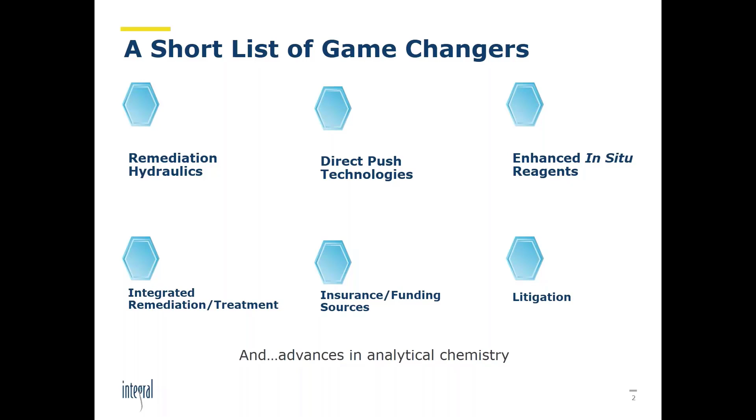And then, some bigger picture stuff: funding sources, the role of insurance historically in our industry, what it might look like in the future, and litigation. I think it's something that often isn't talked about, but I want to address it because it does affect what we're doing in the remediation world. Also touch on advances in analytical chemistry over time, what I've seen that means for us, or what it might mean for the future, and then possibly some other forces at play more recently that could affect our world.

Just getting into it, it's been over 15 years since Remediation Hydraulics was published by some of my former colleagues at Arcadis. And if people aren't familiar with this textbook, and much work that's happened since then building off of it, I highly recommend reading this, absorbing it. This was really a breakthrough effort.

A lot of people were involved in it to really understand, when the application of in situ reagents, what were we really doing hydraulically in the subsurface? And that wasn't really that well understood. I think people forget that, and all the lessons learned and all the hard work by so many people on so many projects to get a better handle on injection pressures, fracking conditions, non-fracking conditions, what is an appropriate volume, let alone dosing, to put in the ground to affect a certain remedial strategy.

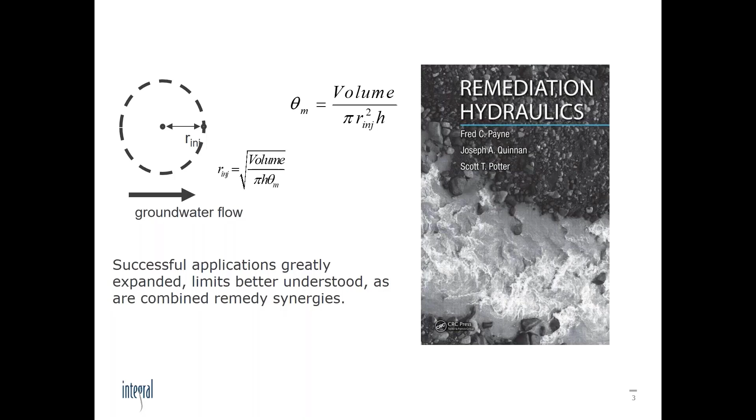And this has continued to evolve. And again, still a lot of great work has been done since this, but this was a fundamental breakthrough effort. And I think it's important to acknowledge that.

I'm going to sound like the old guy a lot on this talk, but when I started in this industry, we didn't have any direct push technologies. GeoProbe didn't exist, and other types of direct push drilling, let alone all these probes. Really, all there was cone penetrometer technology, and then there started to be an evolution of environmental applications from cone penetrometer technology. Fast forward to today, we have the HPT tool, we have TarGOST, we have all these MIP tools. We have all these sensors, and it continues to evolve.

These applications of direct push technologies, and we're understanding their limitations better as well. But the ability to collect a lot of high quality data is a blessing compared to where we've been in the past. We can collect a lot of data for a lot less money than we used to. But I think the challenge that we have is finding the sweet spot with site scale and really cost efficiency.

There's some sites that are very, very well funded, let's say by the federal government, and we have the luxury of collecting a whole lot of data, frankly, whether it's needed or not, but at least that option is available. And then there's a lot of other sites, perhaps the world most of us live in, where there are limited budgets and we have to make really important decisions about efficiency with regard to data collection. Well, these tools help us make those decisions. And I think the challenge is finding that sweet spot of getting enough data to move the project forward, but with more focused budgets.

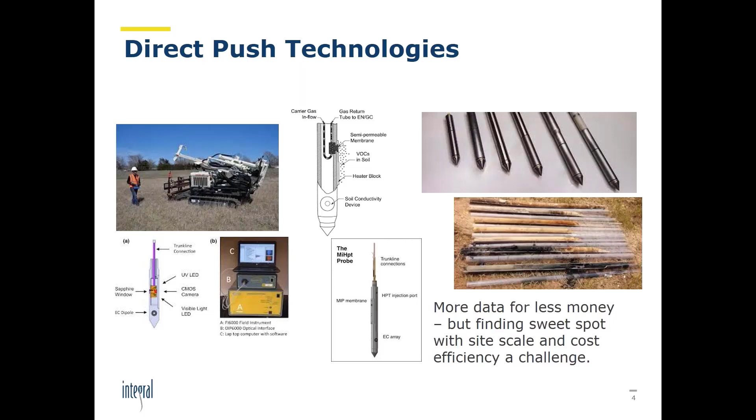But I think what I'm seeing is the real art of this is taking advantage of all these direct push technologies, but still rolling them into the context of an overall conceptual site model that's dynamic and workable and moves a project forward. We've had, in addition to direct push technologies, we've had the development of In Situ Reagents.

And too many to list here. I think there's been an incredible evolution. We didn't have this when I first started in the industry. We've had this incredible proliferation of technology companies like REGENESIS, and development of reagents to treat a whole range of contaminants, and this continues. And really what was a game changer is increased reagent longevity has been a total game changer. If you look at just enhanced reductive dechlorination, but there's other examples.

In the old days, we would inject highly soluble reagents and have to re-inject them relatively frequently. And there were all kinds of biochemical issues associated with that. Now being able to use and inject reagents that last, slower release agents, has reduced the cost dramatically of implementing these remedies. And just another tool in the toolbox. It's really been a revolution.

And again, there's been an expansion. I mean, just look at zero-valent iron and finally cracked the nut on having a soluble form of that to inject. And for years, that was something that was under development. So there's still advances being made.

There's advances being made in combined reagent and delivery approaches. It's becoming more affordable to implement gridded approaches, whereas in the past on the larger sites, we had to take injection line approaches because that was really the more cost-effective approach. So it's just more tools in the toolbox, more options, because we have better injection options and we have better reagents. Sorting through all of that, it's still there's still a lot of work to do on every site to make the best choices there.

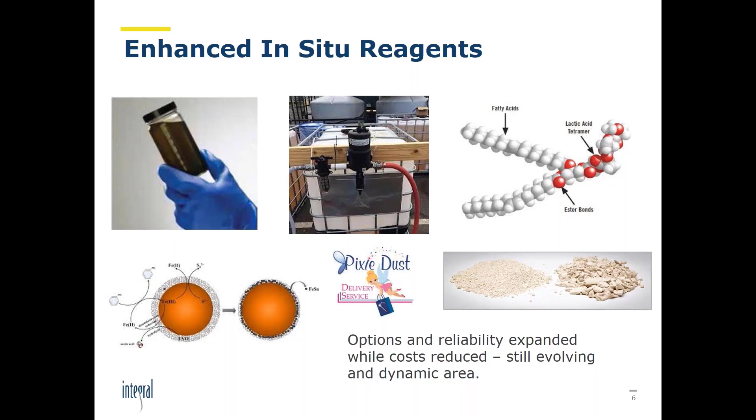But I think there was a shift in our industry towards in situ and rightly so applications, but we sometimes forgot the lessons learned from the mega plumes and the really big sites where in situ applications the scale is not appropriate.

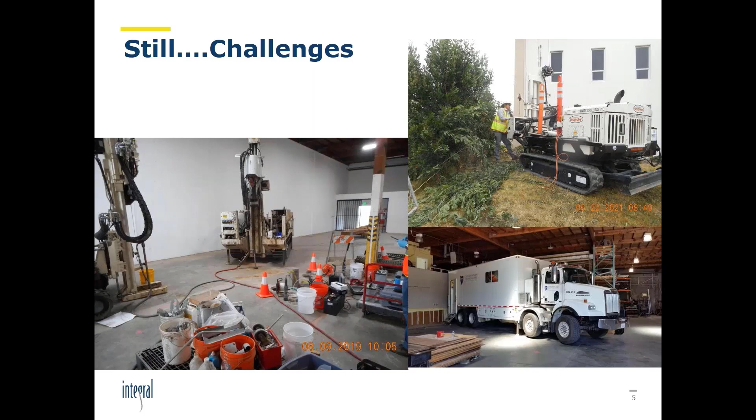Moving forward, I want to talk about something I don't think gets talked about enough in our industry: when you get to larger scale sites and think about sustainability and water supply issues. Emerging contaminants such as PFAS are shining a bright light on how we do integrated remedies that provide finished water where it's needed, whether for agriculture, drinking water, or commercial and industrial applications, while also integrating a remedial component.

And the reality is we're just going back to the future. In the early days of remediation, there were many massive pump and treat sites, with all kinds of issues. But one thing done at many sites, which we've advanced through time via groundwater extraction and reinjection, and focused groundwater extraction and reinjection, is that there were quite a few large plumes that were ultimately remediated and provided a lot of water supply in the process.

And we're seeing a return to that. I can think of some major projects in Southern California, projects I'm involved in, and litigation around these issues. But I really believe we need to move more aggressively toward integrated groundwater approaches that link remediation with supply, especially in times of drought, which we're seeing more and more of with climate change.

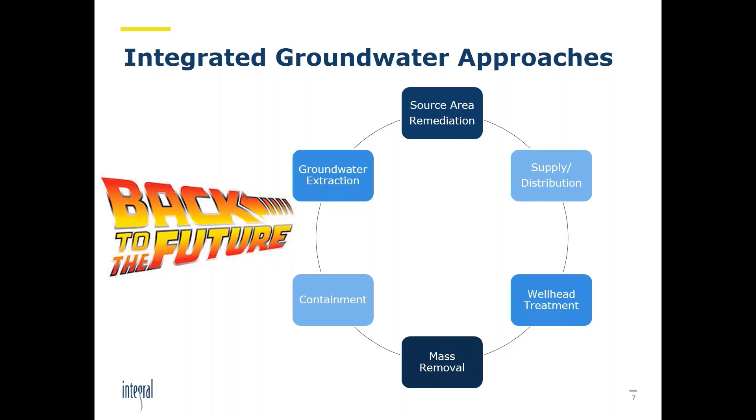So I'll get off my soapbox and talk a bit more. I do think it's important in the remediation world that we keep drinking water supply close to our hearts, because we're going to see more integration here. But I want to highlight that the answer isn't always treatment. When you look at some of the biggest water supply issues around PFAS, it's really important to remember the word mitigation and mitigation alternatives.

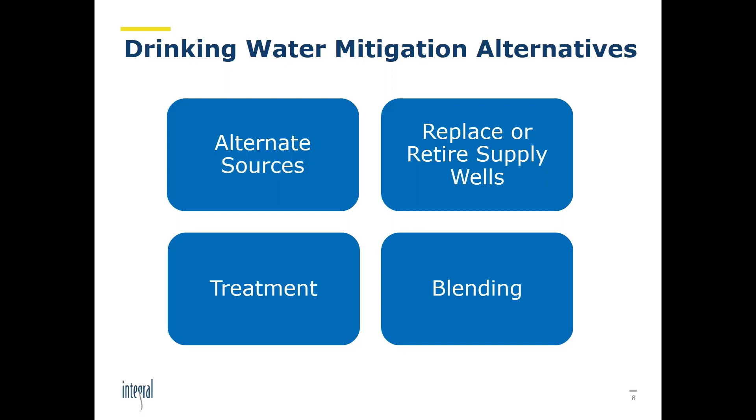Personally I'm very involved in this, and so are other folks. It's about getting into the realm of water supply, where we look at alternate sources, replacement and retirement of supply wells, deepening of supply wells, refurbishment of supply wells, alternate supply wells, sometimes treatment, sometimes a blend of treatment and alternate sources, and blending, which is done all the time in water supply to deal with various constituents of concern. These are tried and true tools in the toolbox, and I want to make a plug for remembering how much we've learned about these things and how much they can be applied in drinking water treatment, but also in remediation as part of integrated remedies.

Let's talk about funding sources and non-technical things. Whether folks realize it or not, so many major big projects that I worked on over my career, and still work on, have been funded by general liability policies. These are old policies that companies had to cover general liability, and environmental contamination, to speak plainly, fell under them, so you could claim costs and get funding for remediation. That was a big driver, and it still is a big driver in our industry, whether people realize it or not.

But over time, even before I started in the late 80s, those policies were being rewritten in a way that excluded these broad terms allowing claims for pollution. It's been 30 years or so, and some of these policies are maxing out, some have expired.

You've got the newer policies out there. So the funding, this general liability is a funding source, let alone other insurance products related to cost cap insurance and things of that nature, which have largely, almost entirely gone away, that funded a lot of work as well. This source of funding is less than it used to be.

What will it look like in the future? I think it's kind of a game changer. There will have to be other sources of funding. And when you look at PFAS, that's almost being entirely written out of these policies because the insurers have learned. So just something to be aware of.

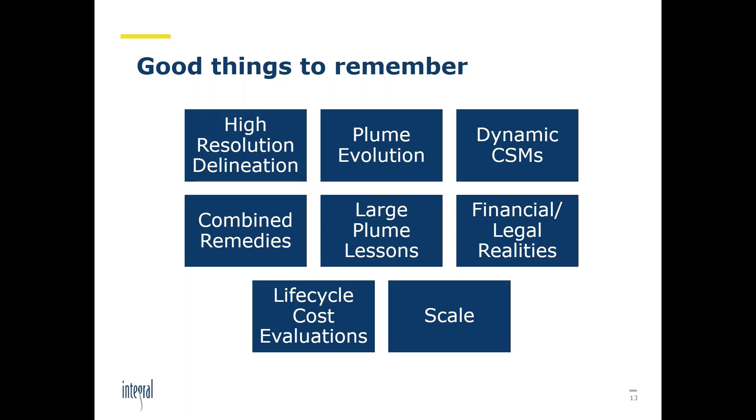And I'll just throw this in here, and then I'm going to run through about six slides on PFAS and then hand things over to Ryan.

We're hearing a lot about ESG criteria - environment, social governance. I'm not going to say a lot about this other than things are evolving, and there's some questions being raised. Will spending habits adjust in a changing world towards truly sustainable projects? What is sustainable? We're already seeing some changes here, but will we see a lot of changes towards climate change driven spending versus, a lot of what we've seen in the past, cleaning up low threat anthropogenic chemicals in the environment? Will there be a shift in priority due to climate change?

I think sometimes we think there's infinite funding available for our industry, but will there be a refocusing around drinking water mitigation? Will there be a refocusing around what truly is reducing risk? We've been talking about this stuff for decades. Hasn't really happened yet, but I am concerned about it with regard to PFAS and other emerging contaminants, are we making the mistakes of the past and maybe not focusing our resources as well as we could have?

It's something to think about, and I think ESG and other related topics could be other forces that help change how funding occurs. Let's shift gears to PFAS, and I know I'm taking up a lot of time here, so I want to just address a few things.

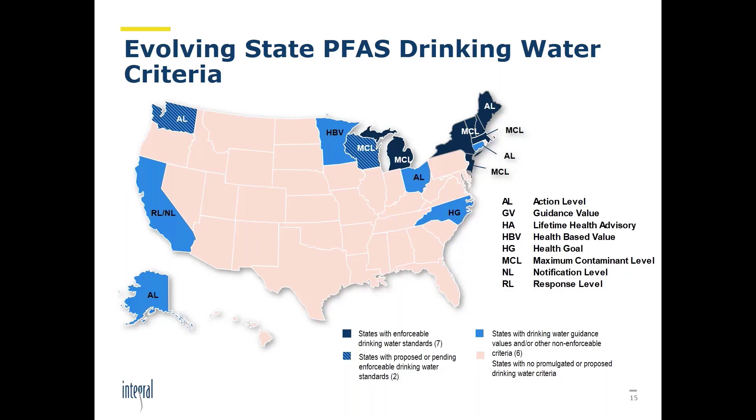Integral is preparing some interactive maps that will be on our website in the next couple of months for groundwater, surface water, and drinking water, just because I think there's a lot of misinformation on this, and it's important that we're all on the same page when we have these discussions.

Here's the actual enforceable drinking water standards in the United States right now. The ones in Washington are proposed. Wisconsin just moved from saying, hey, we're going to regulate 2 to 4, but they still haven't figured out what those are, but the intent is to do it. But these are mostly long chain PFAS, and you can read up on resources to understand the difference between long chain and short chain PFAS, but there are some short chain PFAS in here. But anyway, it's important sometimes to just see it all in one place where we are.

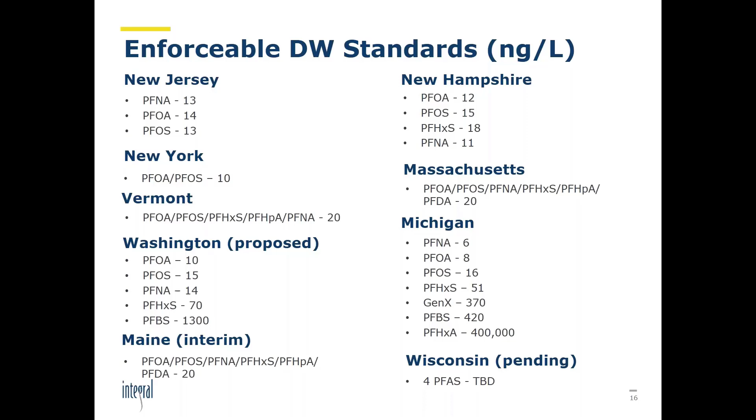What's going on with this? Some states have chosen, and again, I'm just going to focus on drinking water here because I think it's representative. Some states have taken an individual approach, we're going to look at each compound, we're going to assess the risks individually. And then we have some states that are regulating PFAS as a class. There's a lot that's been written on this, and I encourage people to get learned up on this. It's a really different mindset and approach being taken by regulators.

And in Colorado, in their surface water regulation, which is what they have right now, it's a mix. It's really interesting, actually an interesting regulation to read. But I'm just trying to increase awareness here. There's a lot still being sorted out here.

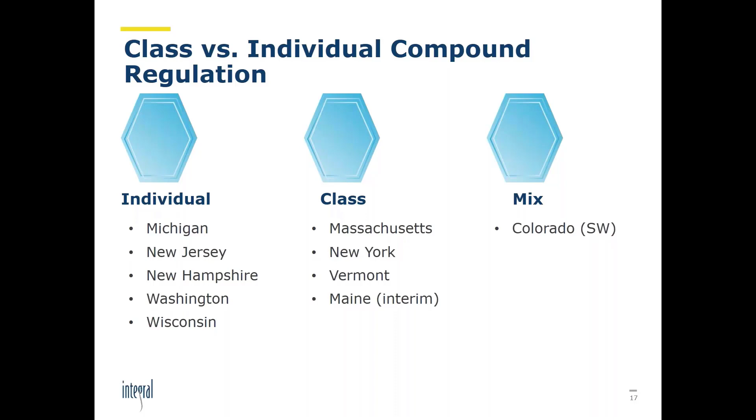Just looking at short chain PFAS too, because there's been a lot of conversation about short chain PFAS. I recently did this for a project, just looking at what is for PFBS, PFBA, GenX. These are the PFAS that are being regulated with enforceable drinking water regulations in the U.S. right now. Just look at the range in some of these. Look at the range for PFBS. Look at the range for GenX. Look at the range just in general.

So it's what this represents. There's a lot of conversation on this subset. These large ranges reflect different interpretations of risk between short and long chains, and also just within the short chain subset. There's a lot of discussion and concern about this, but I really think it's worth asking the question: how many projects are really going to be driven by short chains, and is there going to be a consensus that's built around PFAS in general, but the short chains in particular?

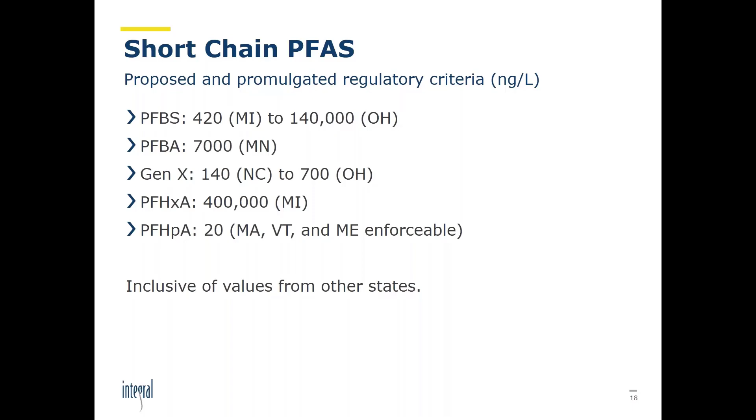I was recently working on a project where the client was making a big deal about, there's basically fear about short chain PFAS in the water supply. But when we actually looked at the data, none of the short chain PFAS that were there, and there was maybe 3 or 4, were anywhere near any proposed limit that's out there right now. So it was a good educational moment, I think, for everybody on the team.

I know it might be uncouth, but I'm gonna suggest reading the own paper that I published recently. I wrote this paper for people that want to just get up to speed and have some perspective on PFAS. I was asked to do this by Groundwater. There's just so much information out there, so I was just trying to be helpful.

This addresses regulation, risk consideration, relative risk consideration between contaminants, comparisons to other COCs, mitigation, appropriate risk reduction, and most importantly, it's a compendium of so many other people's great work in the references that I steer folks to, just to get up to speed and begin to ask their own questions.

In the end, I firmly believe we can meet the challenge of PFAS. We've met it for so many other contaminants, but we could use some more practically applicable in situ and ex situ technologies on the table that address a range of site scales. Lots of progress has already been made. We have some challenges with residuals management, but we had those same challenges with dioxin and PCBs. So again, a lot to be hopeful about in terms of addressing PFAS. I think the concern by me and others is that we'll just repeat some of the mistakes of the past, which is maybe not focusing our resources and not doing risk-based remediation.

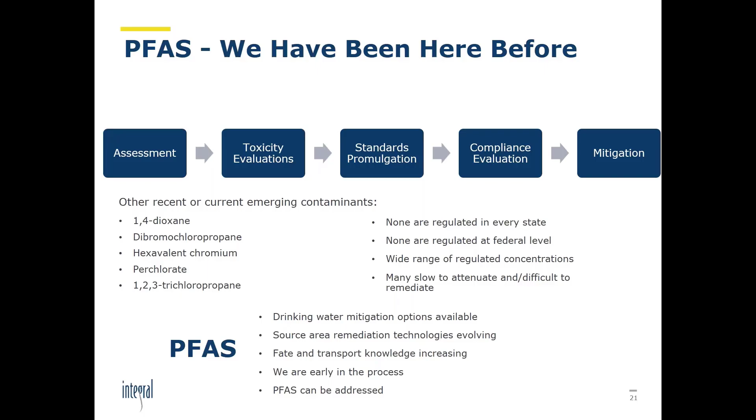Thank you, Avram. Appreciate that detailed information. It really goes well with what we're going to be talking about.

This is Ryan Moore. I am the Great Lakes Senior Technical Manager and REGENESIS PFAS Program Manager, based in Northwest Indiana, just outside Chicago. Today, I'm going to talk a little bit about our PlumeStop technology and how you can utilize it as a cost-effective approach to mitigating PFAS risk.

Like you just heard, there are a lot of challenges when dealing with PFAS. I kind of put some in a non-technical and a technical basket, where the non-technical issues are very important, and sometimes I think have created this awareness of PFAS much more so than other contaminants.

You have a lot of grassroots organizations out there who are maybe living within a PFAS plume, or find out that their water wells contain PFAS. They become involved, and through social media and other means, develop and become very vocal about specific issues going on in their environment. Movies such as the Dark Waters movie or the documentary The Devil We Know have come out in recent years and highlight some of those same challenges that these people are facing.

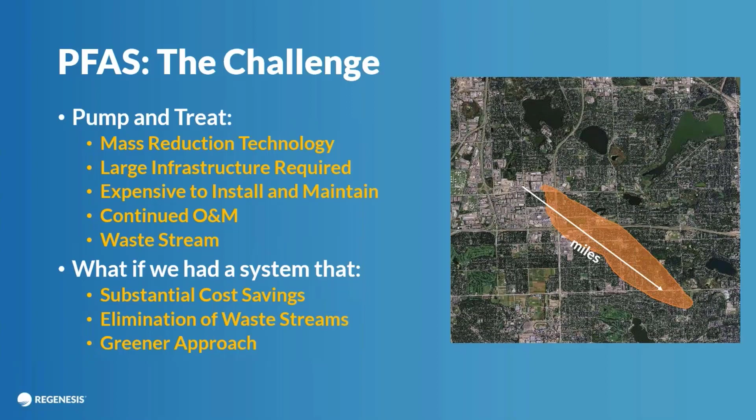Additionally, pump and treat generates a waste stream. Technology's gotten better to try to reduce that waste stream, but it seems like a lot of it just becomes more concentrated and more difficult to get rid of. As federal regulations develop, these compounds could be listed as hazardous waste, making it even more difficult to address. So what if you had something that could give you substantial cost savings over pump and treat, eliminate the waste stream being produced, and offer an overall greener approach? These are some of the questions we've looked at, and why we want to utilize PlumeStop technology as our solution to address those scenarios.

The goal with PlumeStop, for most projects when we're using it to treat PFAS, is to install a series of PlumeStop filter zones. As groundwater passes through these filter zones, it becomes clean, and on the downgradient side we prevent that migration of the PFAS compounds. So what is PlumeStop?

PlumeStop, or liquid activated carbon as we call it, is activated carbon that's been processed and milled down to the size of 1 or 2 microns—super small, the size of red blood cells. That carbon is then suspended as a colloid in a polymer solution. We take that product, ship it to the site, mix it with the appropriate amount of water, and inject it on site, where it disperses very widely under low pressure. In essence, what we're trying to do is create an underground purifying filter within the aquifer.

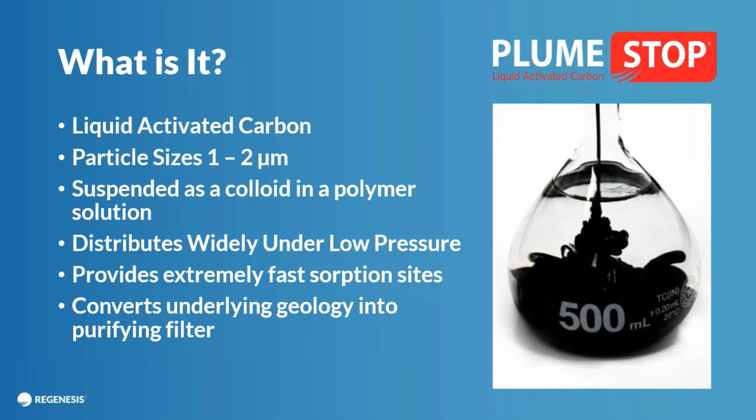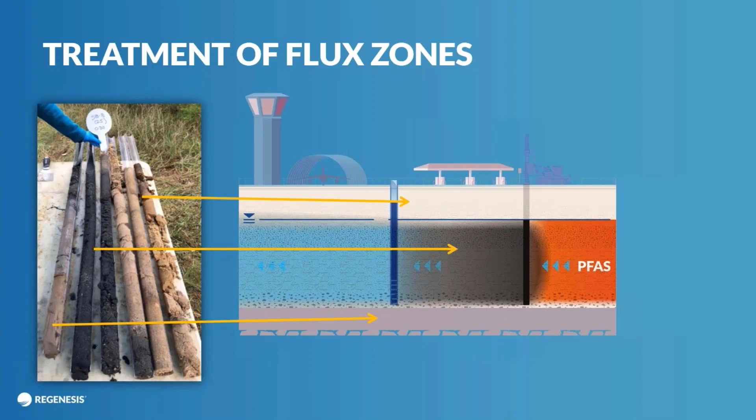The goal for any PlumeStop project, not just for PFAS but also for benzene or chlorinated solvents, is to apply it in situ within the same zones that the groundwater is passing through. The picture shows that we want to intercept that contaminant plume with the PlumeStop technology. It does a few things: it prevents the continued migration of that contaminant, and it also protects against back diffusion over time, either from above or below our treatment zone. This is our goal for every PlumeStop project we work on.

With PFAS specifically, what are we trying to do? The goal is to eliminate the risk of the PFAS to the receptor, and that receptor could be a stream, a drinking water well, or just migration off-site to the neighboring property. So what is the risk? It's the hazard times the exposure. If PlumeStop can bind up that PFAS in situ, we've eliminated the exposure down gradient, therefore we've eliminated the risk, and that's really important.

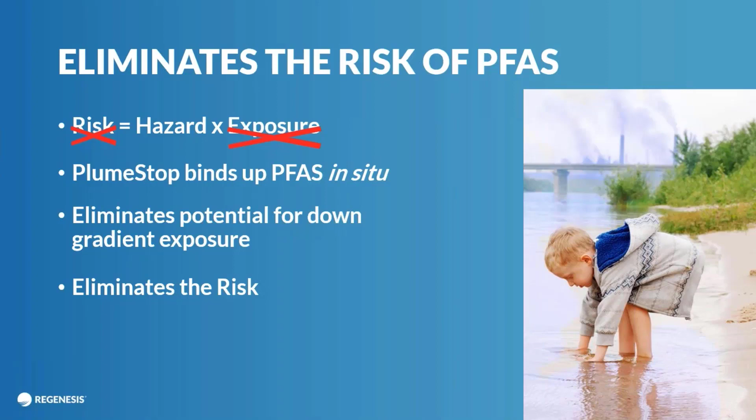As the groundwater plume moves through the contaminant barrier, it will pull out additional contaminants, so you can make that barrier longer based upon the suite of compounds you're trying to address. The models we're running could address VOCs, but also a variety of the PFAS compounds we're routinely addressing.

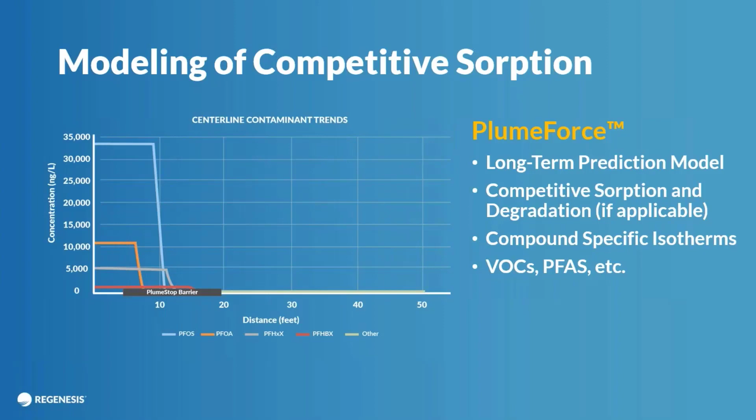Within the model itself, we are putting site-specific information, and this is where high-res characterization is very important, because we can get soil porosity or different soil types input, calculated seepage velocities input in the model, and variations both vertically and horizontally within the barrier placement, so we can make multiple model runs to demonstrate either multiple treatment lines or changes in the geology.

We also look at carbon demand, not just with the target compounds, but on anything that may have affinity to activated carbon. Many of the sites we work on are commingled with other contaminants, so if you had TCE in the mix, we would add TCE to the model run and account for that effect within the PlumeStop barrier, and also account for dechlorination over time. Maybe we've added an enhancement, an electron donor, to the barrier to degrade the chlorinated solvent, but obviously the PFAS won't degrade. So within our model runs, we can account for all these different variables.

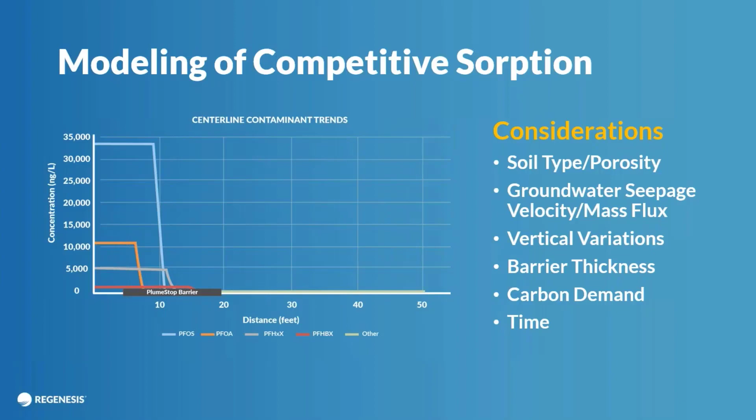Overall, you come to me and say, Ryan, I've got a project site, I want REGENESIS to look at it. What does that look like, or how does that process typically unfold? It usually starts with us asking for the information you have on your site, site maps, cross sections, the data. We'll do an initial review and come up with some initial concepts, then sit down with you and say, we looked at your site, we think we've got a good solution, PlumeStop is absolutely what you need here. However, we've got to do some additional testing or design verification testing to confirm some of the assumptions in the model and our design process.

A lot of that design verification testing is a wide range of steps. It could be just going out with a high-res characterization rig, the HPT, MIP, etc. Maybe we're doing an injection test to try to confirm radius of influence with each injection point before you ramp up for a full-scale application.

Then we'll go out and do the final design. That final design process is in coordination with the consultant, so it's not just REGENESIS doing this on our own in a black box. We're very transparent about it. We want to work with you and have you in the process with us, because no one knows a site better than you do. We're coming into these many times years after you've been working on a project site, so you've got a lot of knowledge, and we want to really integrate that knowledge into the process.

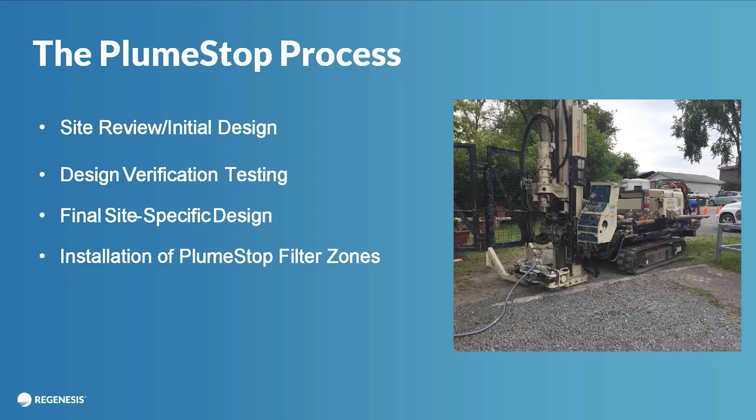And then finally, we'll actually go out and do the installations of the PlumeStop filter zones or the PRBs, or whatever that design may look like, through our REGENESIS Remediation Services group.

For PFAS specifically, PlumeStop has been very successful. We've got dozens of sites in the ground and performing, and hundreds of sites worldwide that we are looking at and implementing designs for, working through the approval process. A lot of these projects take years to develop and actually go into ground, and PFAS is no different, especially with some states where they're thinking about changing regulations, or they just recently got a new regulation, and it takes time for people to work through what it means or what they have to do to mitigate risk at their sites. But when they get to that point, PlumeStop has been a very popular approach for a lot of reasons, and I'll talk about that more in a second. But again, it's been widely accepted across the globe.

The type of project sites, mostly, we're doing everything from airports to manufacturing facilities to EPA funded sites and DoD sites as well.

Kind of go into the key benefits of why you'd want to use PlumeStop. It's a topic for another presentation, but we have found that the PlumeStop approach is significantly lower cost when compared to a pump and treat system, kind of that life cycle cost or life cycle look at your project.

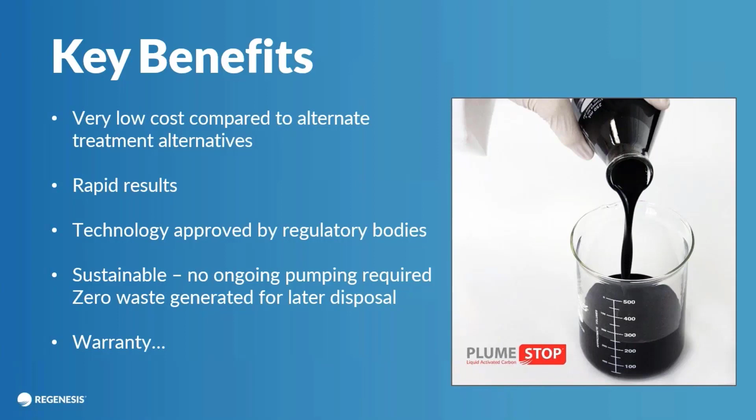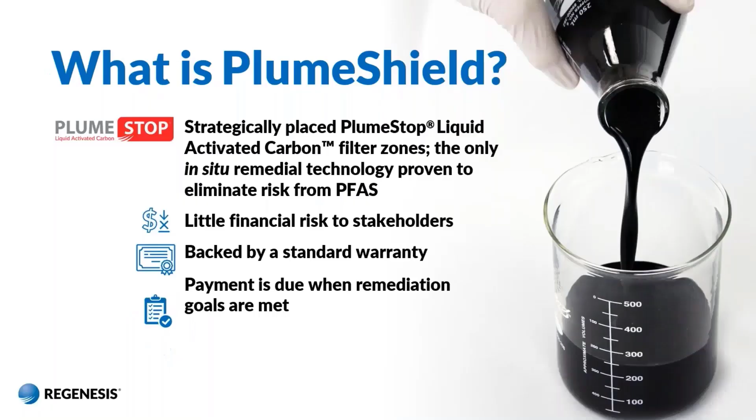I want to introduce you to PlumeShield, and I know this has been talked about a little bit before, but PlumeShield is a new system that we are developing and rolling out through REGENESIS. In essence, PlumeShield is a program for your project, for your PFAS site, where we'll use the PlumeStop technology again to create these different filter zones in situ to eliminate the risk.

It's backed by a standard warranty, and there's options for extended warranty as well. There's little financial risk to the stakeholders, and the reason why is that we're not going to require payment until the system is performing as designed. And that's some very important stuff. So we're going to put our money where our mouths are, and we feel very confident with PlumeShield and the PlumeStop technology that we can go out and offer this type of program.

There'll be more discussed about this program in the near future, but I just kind of wanted to trickle a little bit more details out for you now. And with that, I'm going to end my section, and I want to thank you guys for joining us, and thank you, Avram, for your presentation as well.